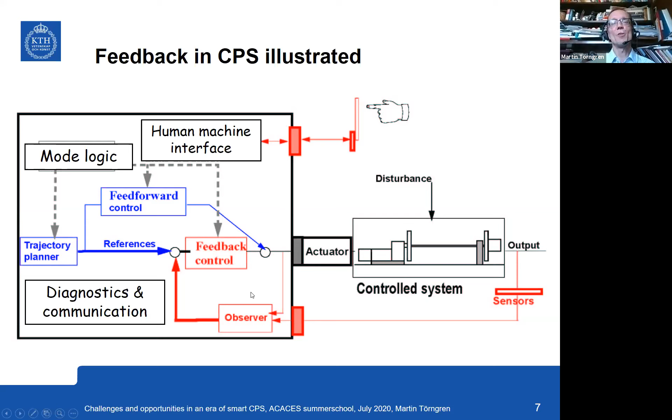Okay, so cyber-physical systems as integrations of computation, communication, and physical processes are clearly here to stay. They have been around for a while, but they will have unprecedented capabilities. We are pretty far ahead in introducing automated vehicles, automated trains, automated anything in the future, automated flying aircraft, automated delivery of packages and what have you. This brings unprecedented capabilities, but also unprecedented challenges, and we need new methodologies to deal with these systems and to direct them in the right ways.

Clearly, we want to use these capabilities in a useful way so that they are human-centered. One important aspect of that is that we have to deal with sustainability. We are overusing resources on our planet. There is something called the overshoot day, and the resources we are using, we are actually depleting the earth of resources.

And we are into an economy where we are taking raw materials, building things, then using them and throwing them away, creating large amounts of garbage. We are polluting the air and the water. If you look at the World Health Organization statistics, I was actually shocked to see how large a part of our population on the planet has severely poor air quality, below the recommendations.

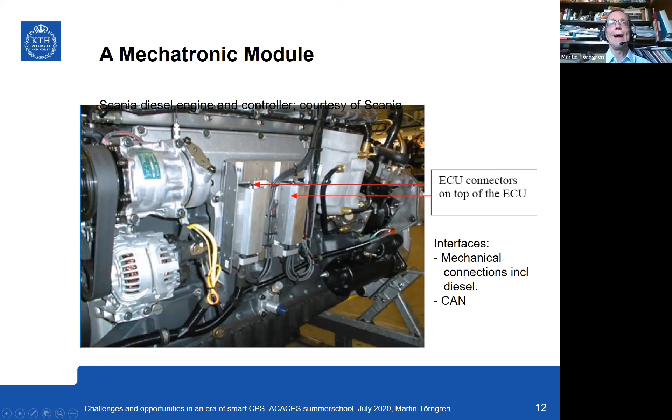If we look at the evolution in mechatronics in particular, mechanical systems were around first. We built cars before the 1970s, and they did not have computers. Then in the 70s, one started to integrate computers to improve performance, for example of the engine, or to improve the performance of the brakes - the ABS systems - to improve braking performance. So we were essentially forming these mechatronic modules.

They were still connected mechanically, and then after a while, we added networks. From the perspective of physical systems, you see similar trends in different domains. In factory automation, these networks were added in the 70s, in aerospace in the 80s. In automotive, controller area networks emerged in the 1990s. And now today, of course, we have wireless external connections.

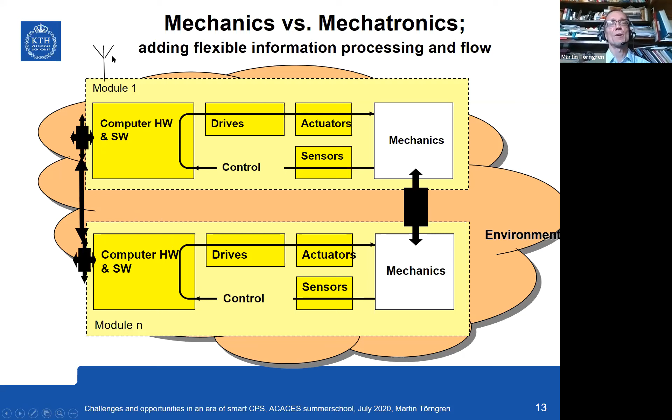This then summarizes one view of cyber physical systems, where we have physical aspects on one side, like in mechatronics, the laws of physics, Newtonian mechanics, and the information side, the cyber side, with logical connections.

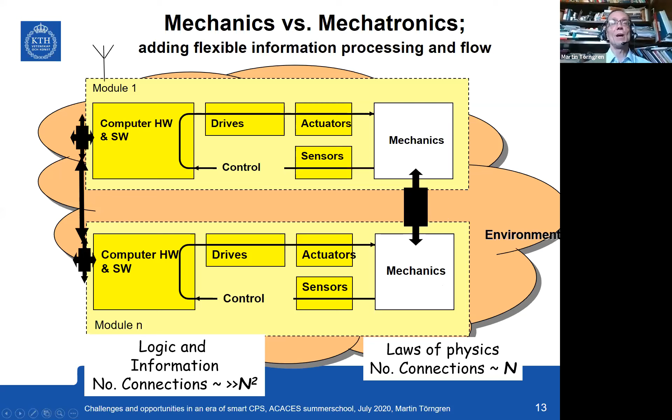Okay, so where has this led us? Well, it means that we have gradually introduced these systems, and we have introduced automation.

In the beginning, we had automation using mechanical, electronical, and pneumatic systems to do simple logic. Then we introduced computers, and typically automation was about relieving humans of doing dirty, dull, or dangerous work. For example, here you see a robot doing welding, and computers are very good at doing these repetitive tasks. And we put the robots in a cage.

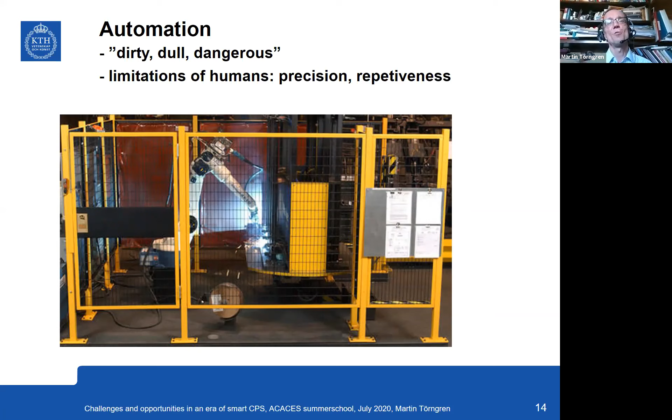So these are two dimensions, and then we have additional dimensions which could be related to what is the environmental scope, what is the complexity of the environment and the capabilities or the tasks, what is the complexity here? And this is essentially what we are seeing with automated driving.

So in the automated driving community, they took these old taxonomies - it could also be multi-agent - and they created a taxonomy for automated driving. And I think many of you have seen these levels of automated driving.

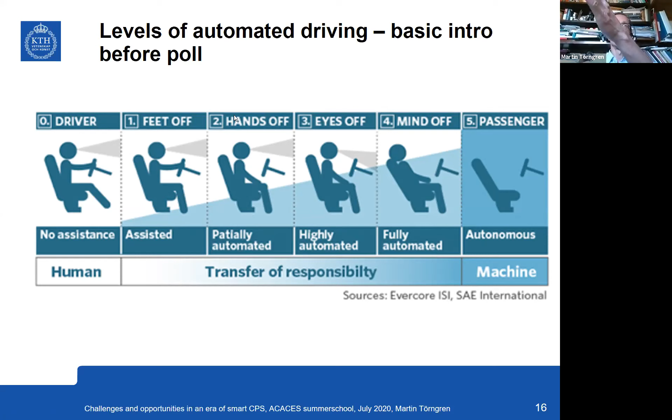There is a very simple interpretation here, a bit simplified, talking about feet off. That might be like adaptive cruise control - the longitudinal control is automated, you still have to steer. Hands off - now the car also does steering for you, like automated driving in the lane on the highway: acceleration, braking, and steering. But if you want to change lane, you still have to do that.

So feet off, hands off, eyes off - that's what we call level 3. Now the car can go from point A to B, but you as a driver, you as a person, is still responsible. Mind off means that now you're not responsible anymore within a restricted environment.

So going from point A to B on the highway, you don't need to be present. You could look at a movie, you could perhaps even sleep. But this is not as trivial, because these regions where automation is implemented could be smaller or larger. So likely you would have to take over, or the car would have to stop, but it would have to do that automatically. Level 5 basically means automation present everywhere.

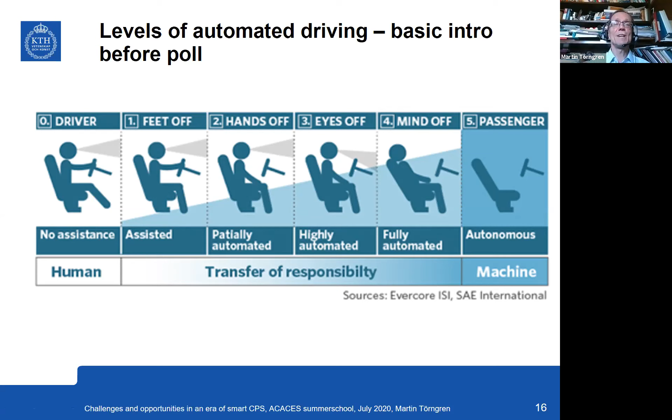Okay, so these are the levels, and you can see here that there is kind of a complexity involved. Yes, and I will be making no distinction here talking about automation or autonomy, and I will also be using AV and AD synonymously.

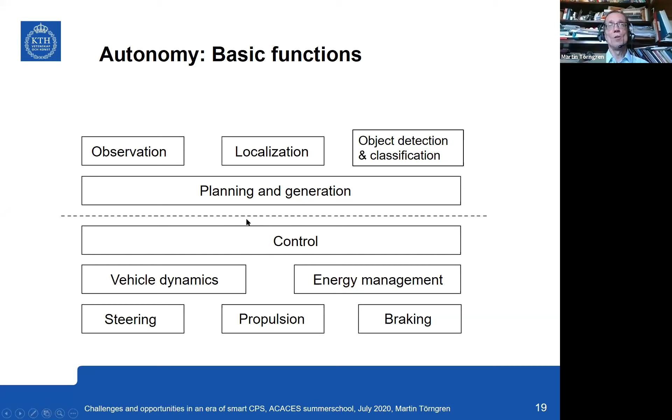Let's look at one example of Waymo. As you know, Waymo is the formerly automated driving project of Google, now under the umbrella of Alphabet. There has been a lot of research on automated vehicles. For example, in California, in the PATH project, they had automated vehicles running in convoys in the 1990s already.

There have been quite a few demonstrators around. DARPA Grand Challenge was really pushing it, but as you can see here, Google and Waymo have been working on this and are in many ways leading the work on automated vehicles.

Fully self-driving was not available then. We still had level 3 automation capable cars, but still a human supervising and taking over when needed. It was only until last year that fully driverless cars had the test driver removed in some of the vehicles run by Waymo. In most of the driverless vehicles being tested, you still have a person present. Of course you have automation in other areas, and we will come back to how that might differ.

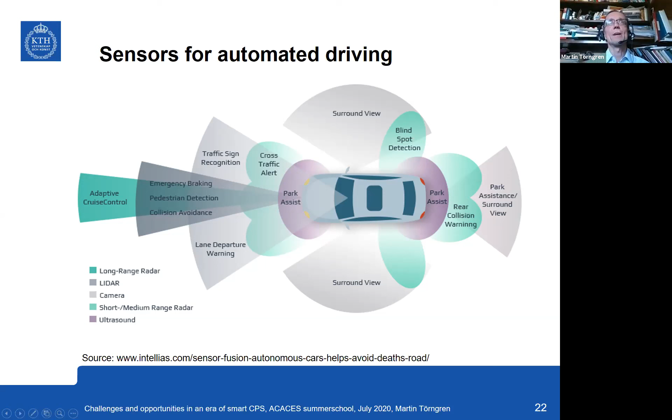Another key aspect here is that when we are putting robots on the streets, automated vehicles, there are different environments we could constrain. Ideally, we would build entirely new roads prepared for automated vehicles, but this is not what has happened primarily.

Instead, we are putting vehicles in very complex environments. As Herbert Simon once said, the environment and the mission in the environment is really the mold that's forging the systems we are building. So if we have complexity here, we need complexity in the systems we deploy to manage this complexity. We need sensors, a lot of processing, sensor fusion, we need to reason about what is going on, do the planning and so on.

To do that, we need heterogeneous supercomputers to deal with different algorithms. Moreover, this is reflected in the expertise and the organizations. So we have unprecedented capabilities and complexity here.

One important aspect, when replacing a human driver with an autonomous driving intelligence, is that we somehow want to mimic or emulate what humans can do. We need the motion control system. We have our cerebellum - the ones who joined me in the stand-up closing-eyes exercise were exercising our motion control system, the motion control coordinator in our brain, the cerebellum, the little brain. We have a capable system there, and we can program and develop these systems.

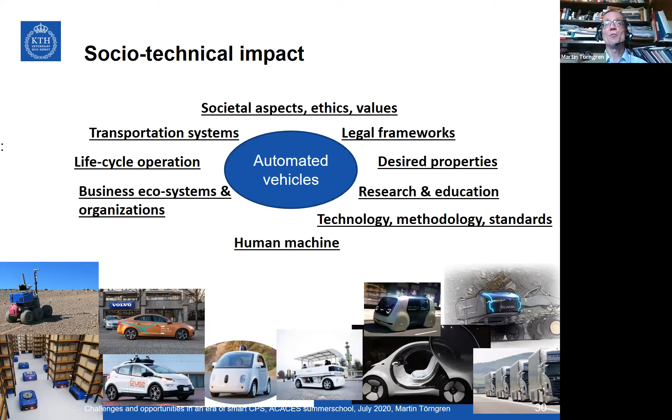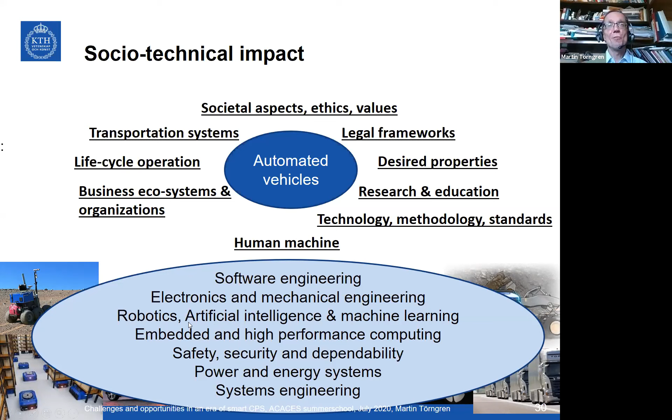And in particular, perhaps for researchers and engineers here, we don't only have all these stakeholders and aspects that are affected, but we also have all these disciplines. Here we are seeing an unprecedented need for integration of these disciplines. For example, how do we reconcile safety, security, and AI? How do we reconcile that with how we deal with robotics, complex systems, and so on?

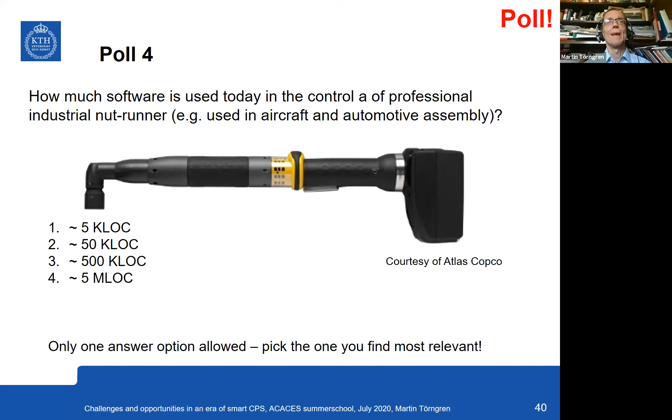You are very knowledgeable and you got it right. The answer I got from Atlas Copco is indeed 500,000 lines of code, which is kind of surprising. You would think, how difficult can it be? A friend of mine helped out with an experiment - we were estimating, if we print 500,000 lines of code with some assumptions on lines of code per page, it actually meant we'd get 8,000 pages, a 1.5 meter pile up in the air. That really says something about the limitations of understanding these 500,000 lines of code.

And why do we have that? Well, programming is an extremely powerful tool, and we will get into that in particular in the next session. We have powerful abstractions, libraries, we can build new services on top of existing ones. If we look at functionality, just like the cell phone - core functionality is making calls, but we use it for so many other things. Here we don't just have the controls, we have interactions with humans, communication protocols, diagnostics. These things are availability critical, so they want to make sure they don't break down before we know it. So they have diagnostics, predictive maintenance. There's a lot of software at different levels, like protocols, operating systems, and so on.

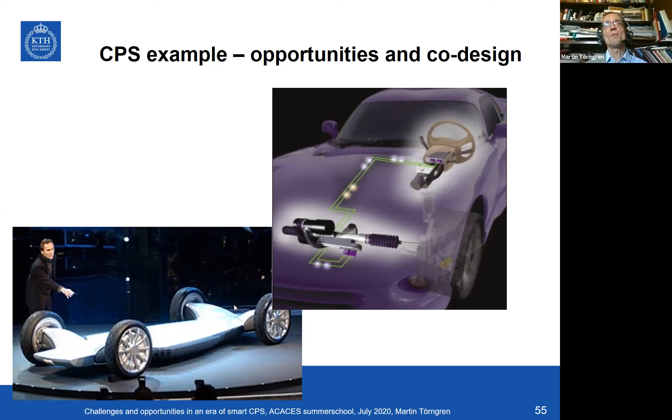This was demonstrated by General Motors and SKF some 20 years ago. So this means entirely new designs, exemplified by their concept vehicle. No mechanical linkages here, as you can see. They also had fuel cells in these cars. So potentially very environmentally friendly, entirely new designs, new possibilities for control, and so on.

So wonderful concepts. Why did they not happen? Well, we had the example already with the Waymo automated cars, and we simply see that technology maturation may take time. If you think about hydrogen fuel cells, the infrastructure is simply not there. We need to evolve the infrastructure. What about the steering rod, the mechanical components that we removed in the concept car? Well, they're actually still mandated by law. It takes time for legislation to evolve.

So here we have an example where we see that taking this shift to leverage the capabilities generally may take time. And as we saw for the automated vehicles, there are different hurdles on the way, if you recall that.

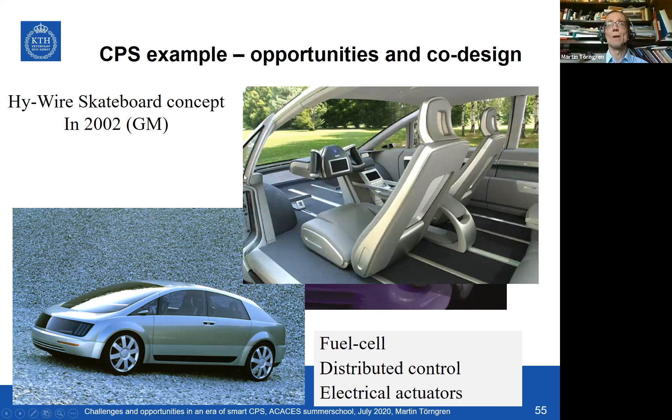So wrapping up on the CPS generalization here, one way to view them is as this integration, and that can be small systems or large systems. This is not new, and what's important is to look at the different types of CPS. But what is new are these entirely new capabilities, the increasing levels of integration. We saw that in the cyber domain, over edge up to the cloud, collaborating systems, deployment in all kinds of domains, integration over the life cycle, putting robots on the streets, open society scale, and the evolution of business models. So this is what is new with cyber physical systems.

And in the last part of this session, we will look at the implications of this in terms of a technical revolution, a socio-technical paradigm shift.

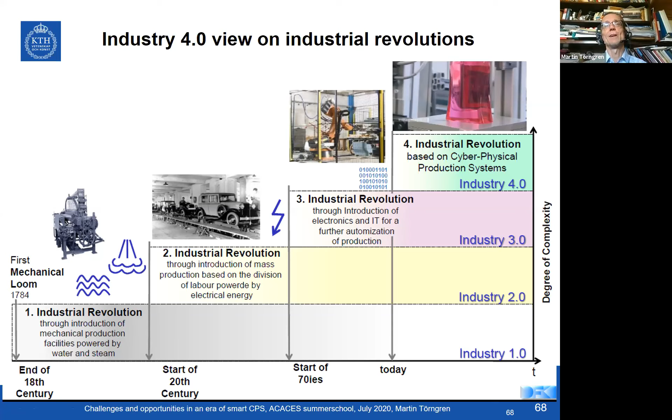And what I mentioned before, when we introduce these new technologies, they're also coming along with new benefits, new performance, improved performance. That's why we introduced them, because we can make money and we can facilitate life. But they also bring along new concerns and risks.

Just to give you a few examples, we talked about the automotive sector, and one illustrative example is that of active safety. So braking systems, automatic emergency braking, mandated on many modern cars today, will brake even if the driver doesn't notice something in front of the car. Airbags, electronic stability programs, saving lives if the car is losing traction, the car will try to stabilize itself. So we are introducing these new systems to save lives, and statistics show that this actually does help.

We introduced cell phones and smartphones to help bring new services, and of course they help us with a lot of stuff. But we are also starting to look downwards. It's changing our behaviors, sometimes not always for the good. We might become more vulnerable. That's one side effect. But these systems are also designed to really grab our attention.